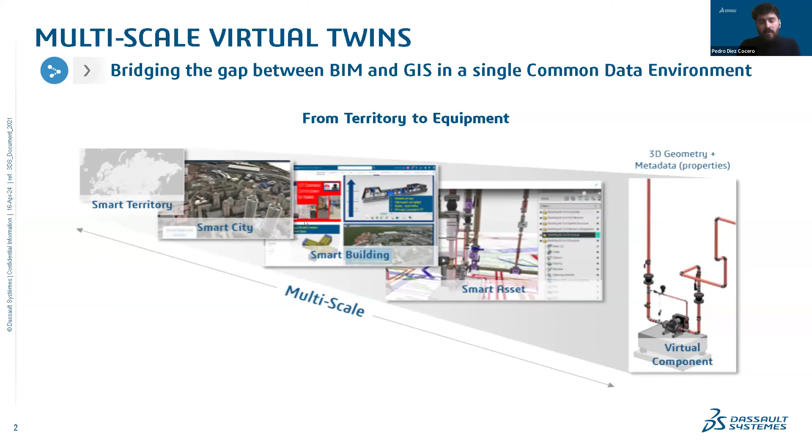And typically, when we look at IFC and specifically building design, we stay at the layer of building, asset, and component. But of course, it's very relevant to look at them from a bigger scale to address these kinds of interactions that I was describing, where these layers are more typically addressed from a GIS standpoint. And traditionally, there exists this gap between the two that we are able to address with 3D Experience. So let's have a look at how we're doing that.

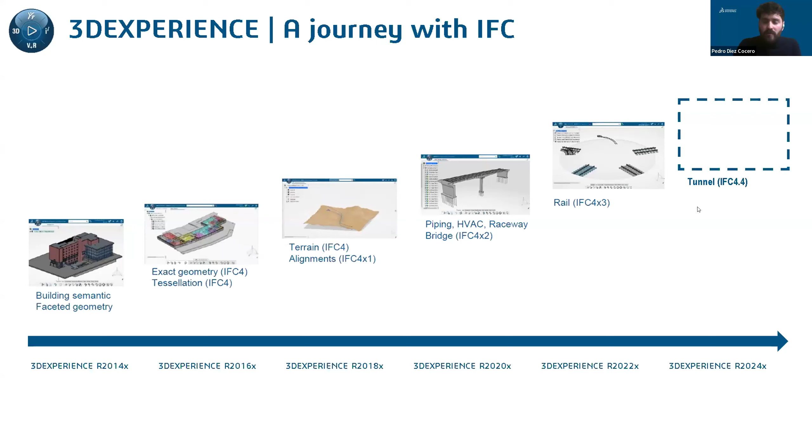Before we get there, I think it's relevant also to explain how IFC is a very important enabler of this right-hand side of the multi-scale virtual twin, how it has been progressively growing to address different scales of the asset as well, and how with our 3D Experience platform, we've been committed since the very beginning to adopt IFC as a main enabler, as a main standard for supporting this building information layer for all the previous versions of IFC, including IFC 4.3, which is now released, and with the current implementation of IFC 4.4, that I think Andrew will be mentioning something about as well.

If we look at how we address IFC with our 3D Experience platform, we crunch all the data that comes in an IFC file, we ingest it in our platform, and we convert it into our data model, where we have different entities that represent the behavior of all the different layers that are inside the IFC file, inside the building. And we're able to capture all the semantics and all the metadata that comes with the IFC file and assign it to these specific components.

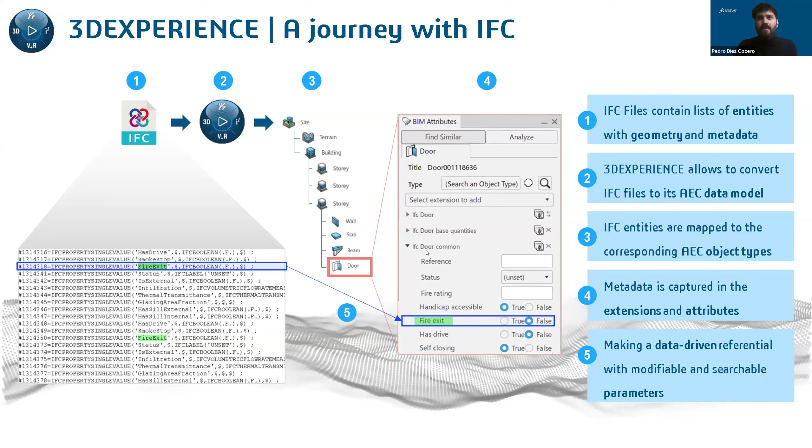So that in the end, we have a data-driven referential that has parameters that can be searched, filtered, modified, and that represent accurately this component scale of the virtual twin. In the end, what we provide is a full data model that addresses all the different semantics that are part of the IFC standard, and that allows us to have this accurate representation of the virtual twin of the building, and where again we are committed to continue supporting the different versions of the IFC standard in the future.

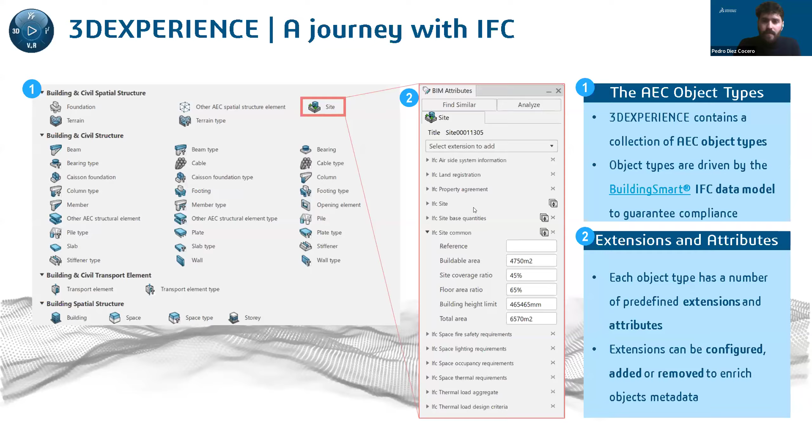In the end, what you get when you import these IFC files into 3D Experience is a connected virtual twin with, of course, the structure, the geometry, and all the attributes. But more importantly, that can be further enriched, that can be connected to other layers of information. It can be tasks, issues, documents that can be addressing the specific element of the asset that they are representing and that they are describing.

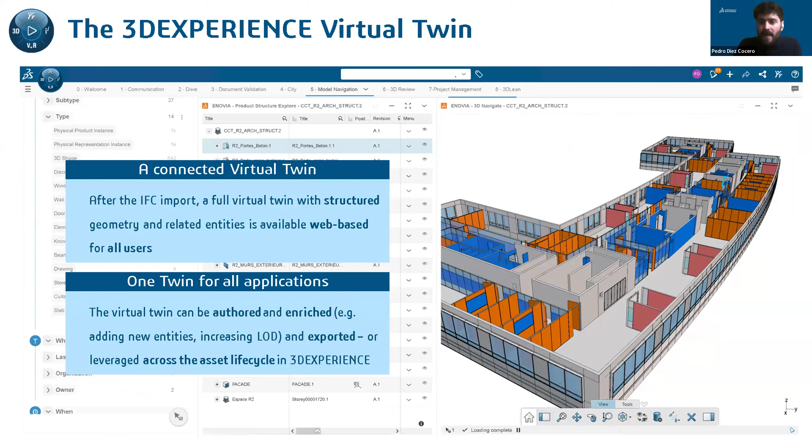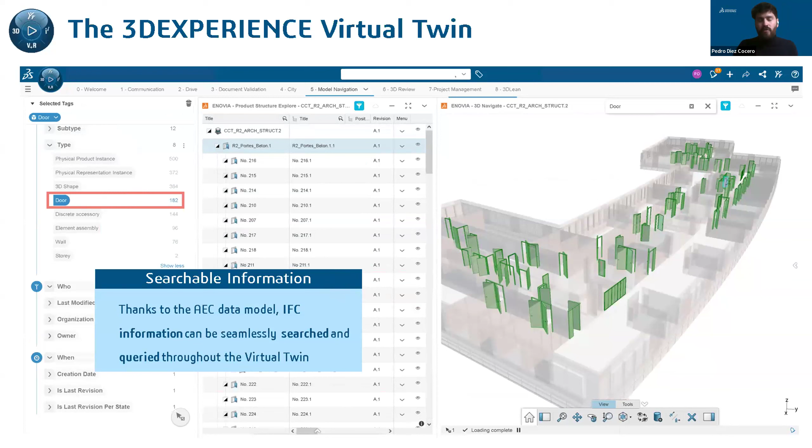And that can also be modified and further enriched, where we, of course, capture all the semantics or the metadata that is behind the asset in a faithful way that can be navigated and accessed by all users from the web browser. And this semantic allows us to interrogate the asset, to run queries, to filter, and to retrieve all the information that is relevant to make decisions across the different stages of the asset lifecycle.

Now we've covered this layer at the building level: the equipment, component, system, and the building itself. But then we need to address that this building exists in a greater built environment. So how we address the gap between the two. And what we have in the same 3D Experience platform, where we are able to bring in these IFC models, is a GIS engine that allows us to process GIS information and combine it with BIM in the same common data environment. So we provide this multi-scale referential from territory to equipment, and that allows us to bridge this gap that traditionally exists between systems that address BIM and GIS separately.

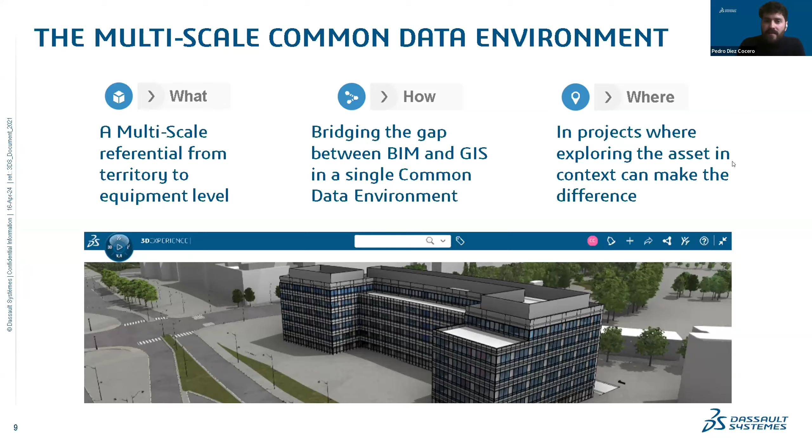And, well, in projects, exploring the asset in context can make a huge difference. And I have some examples, but of course, Andrew and Alessandro will be telling us more about that. So if we have a quick look at what's this multi-scale virtual twin and what we can do with it through 3D Experience, it is that we have this very accurate representation of the built environment that surrounds our asset.

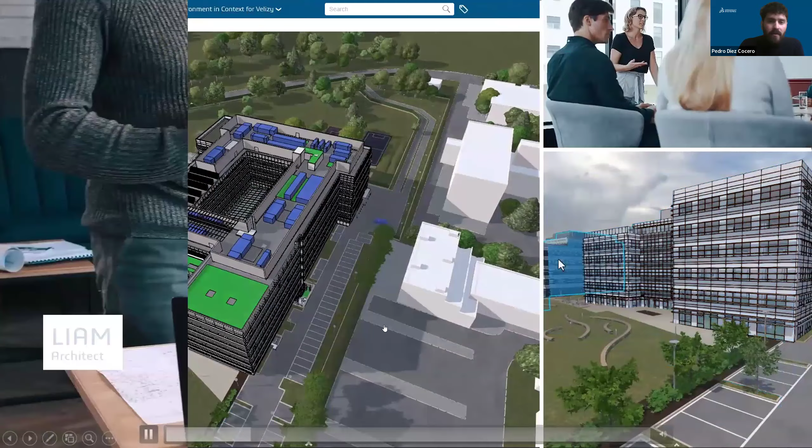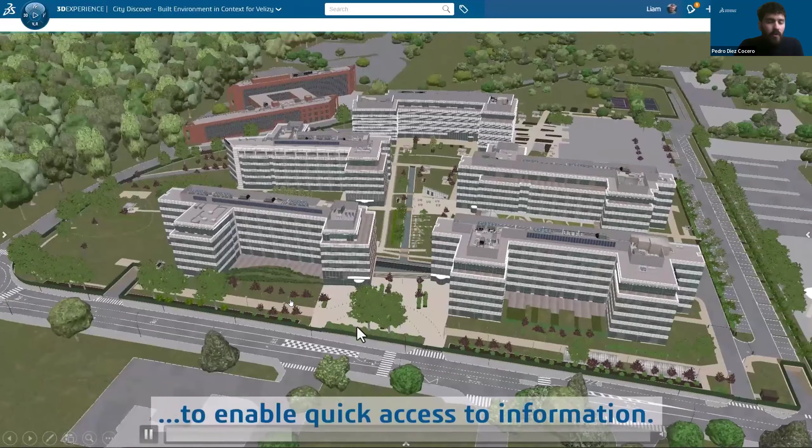It can be at district level, at city level, at territory level, where we can bring in directly the BIM model of our assets. Of course, we have different layers of geographical information in addition to the 3D. It can be anything from map views to orthophotos, CityGML. We also support multiple standards in that domain, with textured models as well, orthophotos, you name it.

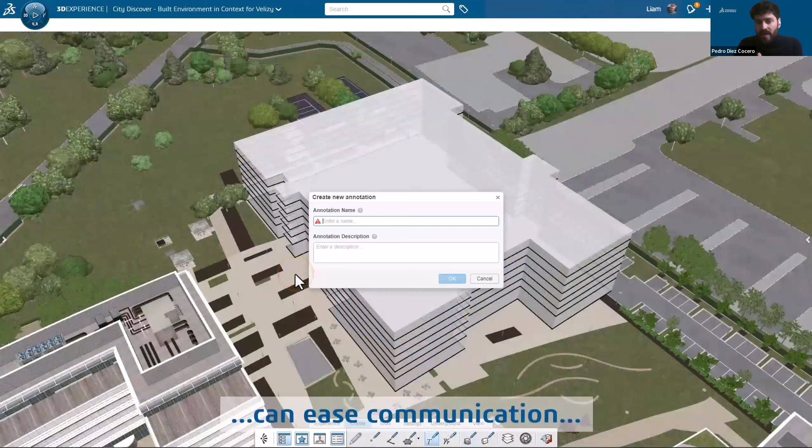And the idea is that we can leverage this GIS referential at any stage of the asset lifecycle, from early on to run this concept analysis where we can already plan a basic shape of the asset in the context where it will be existing. And we can already leverage this referential to make annotations, understand what it is that the asset needs to fulfill in relation to its context.

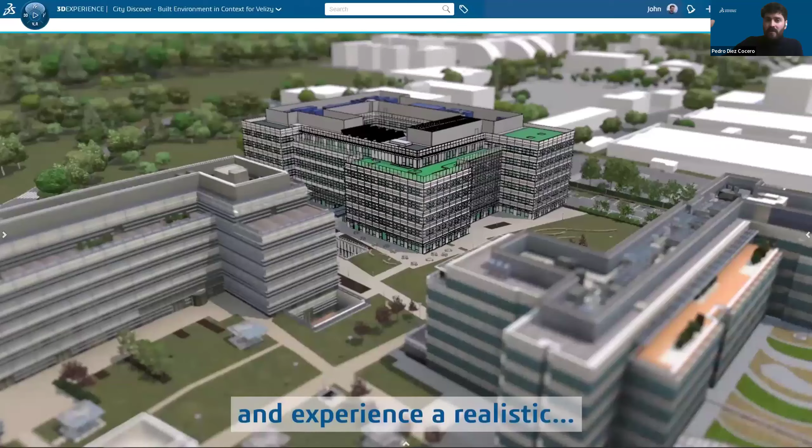Once we have a more detailed representation of the asset, maybe coming from the IFC models that have been provided by our suppliers, we can directly bring that BIM model that has been imported from IFC into the GIS representation and into the GIS referential.

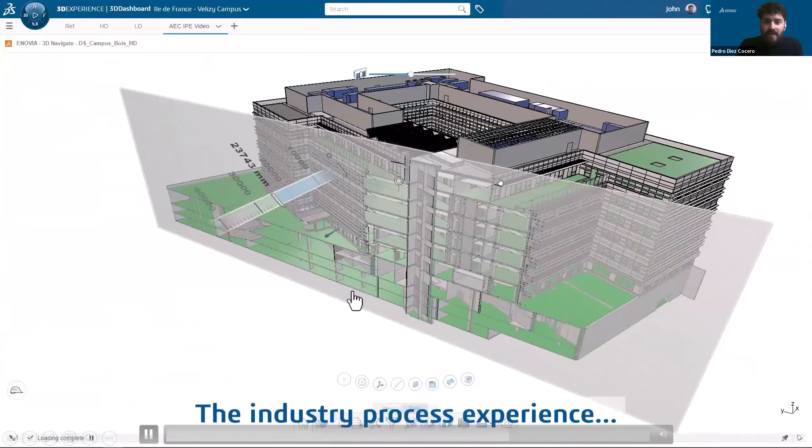And because it's part of the same common data environment, it can also be connected with tasks, with issues, with documents, and we can at any given time navigate the detailed representation of the asset, having a seamless connection between the GIS layer of the building and the BIM detailed model of the asset, having again this multi-scale virtual twin of our asset.

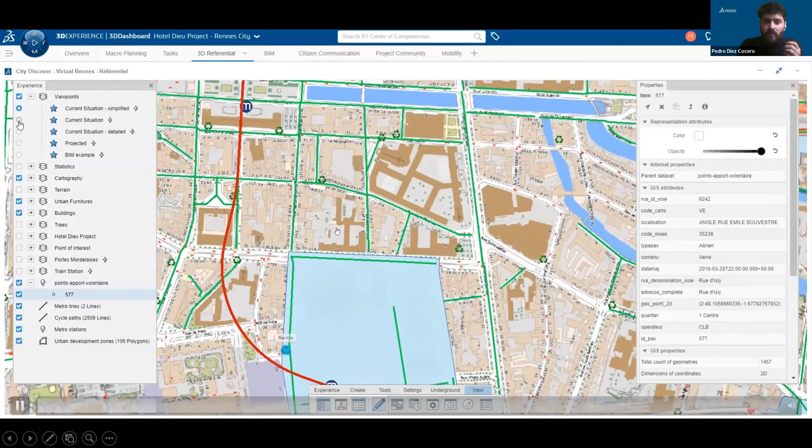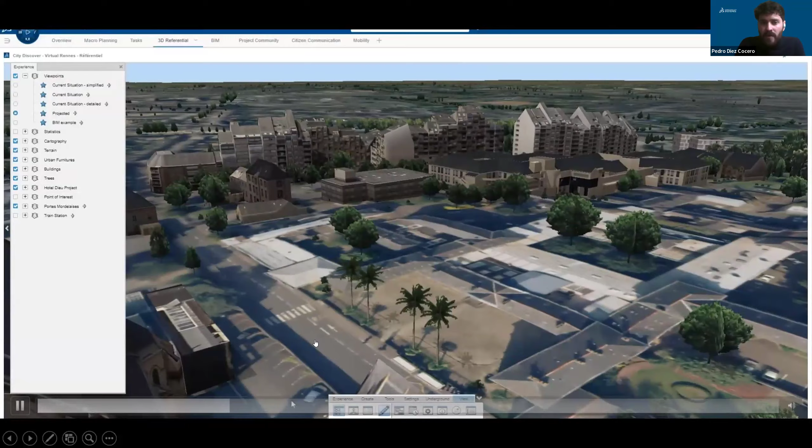Why is this so relevant? It's because we can have this bi-directional connection. So on one side, we can have the case where we have a GIS referential, maybe at city scale or territory scale, different layers that represent a specific district where we want to do the development of a new building or a new project. And we can make decisions based on the information that we keep at GIS layer. So for instance, information on the traffic and the surrounding areas, information on the certain public services that are available per district. And we can use this GIS referential to plan the development of our project.

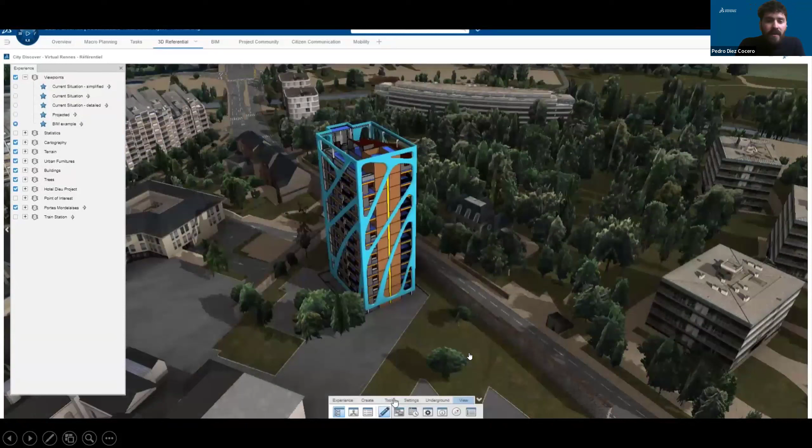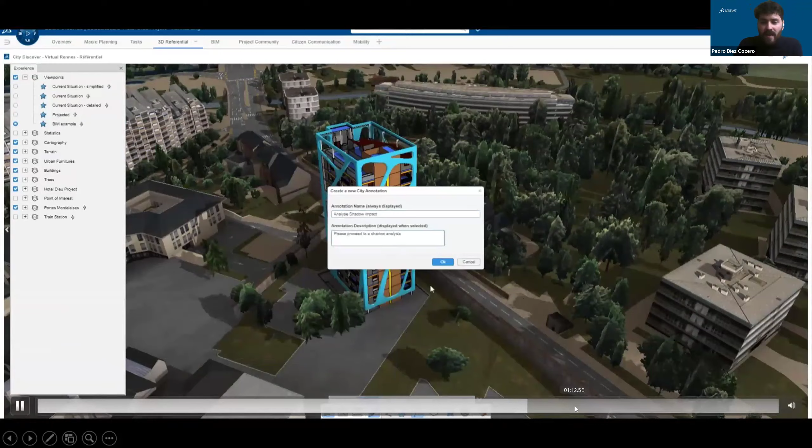And at this stage, we're already able to bring in BIM detailed models directly into the GIS context. That saves lots of time in converting, simplifying, addressing the model. We are able to directly bring in this BIM model, see how it looks in the GIS referential, make annotations, and use that to keep feedback to the responsibles of designing the asset itself. And of course, the biggest value is that in this same referential, we keep these two views of the asset.

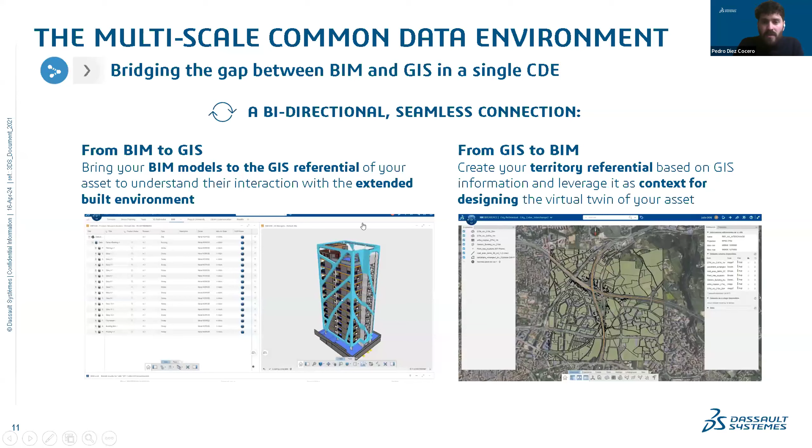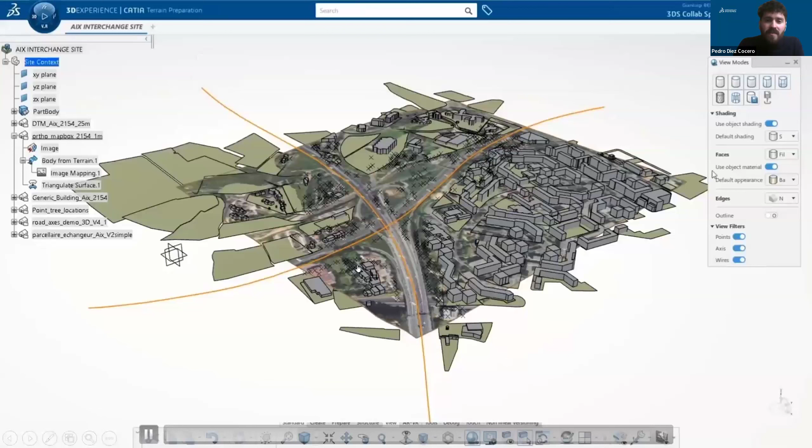So this is one way, bringing BIM into GIS, but the other thing that we can address is the opposite journey. So going from GIS to BIM, where what we're able to do is to extract specific area of the GIS referential where we want to do the design of a new asset. And then we're able to bring it into our own design context. This is in CATIA, embedded into the 3DEXPERIENCE. And we can extract all the information of the terrain of the area where we are going to do the design. And we can use it as context for designing our assets. In this case, it's the interchange of a highway.

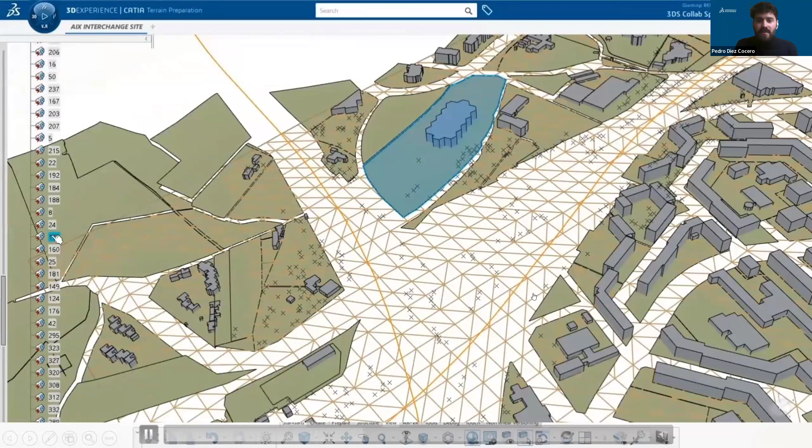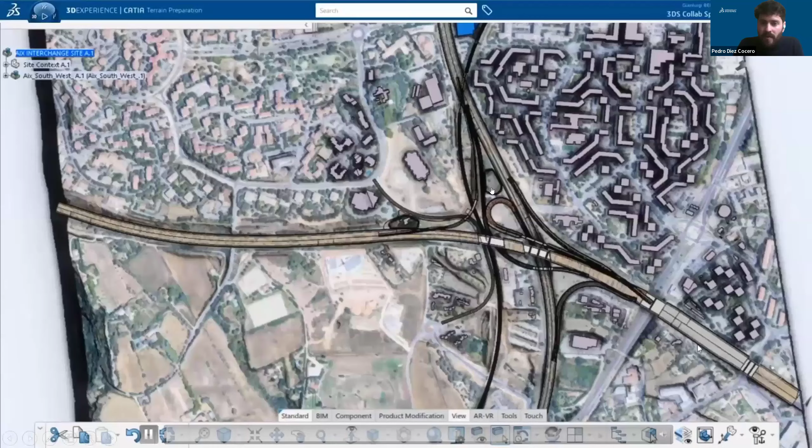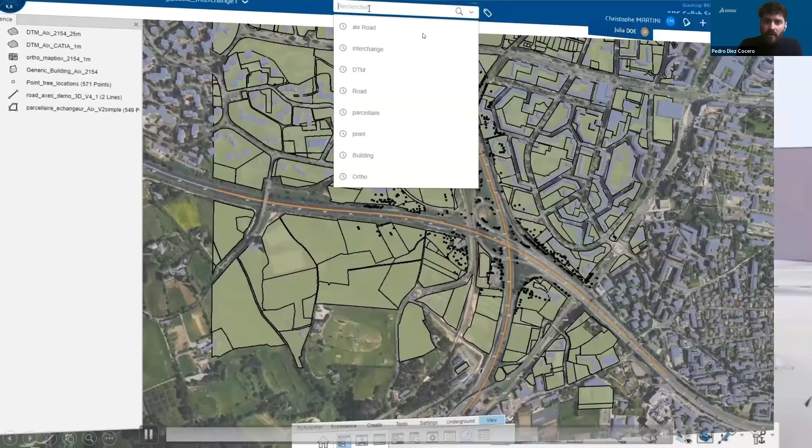And what we can leverage is all the information that is in the GIS that is captured into the design context. So we can use that to do the design of our interchange, making sure that it's respecting all the areas, all the parcels, or the properties, that is consistent and accurate in respecting natural areas, distances, regulations, all that. And once we have this representation of our asset, we can, of course, bring the detailed model, in this case of this interchange, and bring it back to our GIS referential, keeping an accurate representation with the latest version of the GIS referential for the asset itself.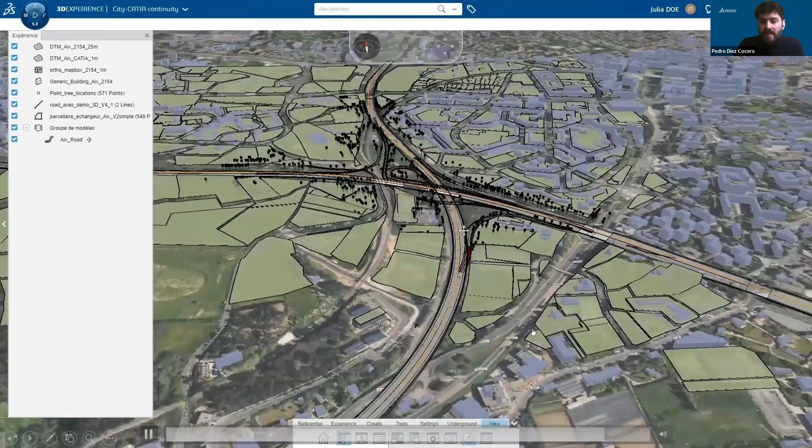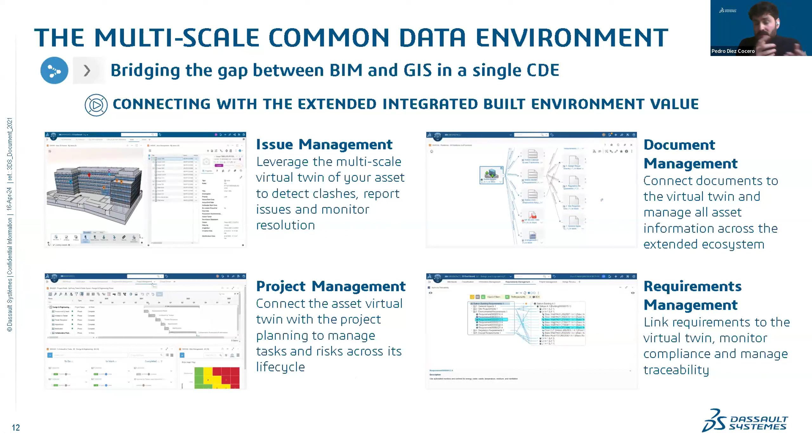Something important to stress here is that it's not just a beautiful representation of the virtual twin of our asset. It has all the layers of a common data environment behind. So we're talking about being able to do issue management, leveraging this multi-scale virtual twin. We're able to connect documents that are related to the asset at any given level. We can do project management in the same virtual environment, in the same common data environment. We're able to manage requirements with full traceability on all the information, being able to have access to this golden thread of information connecting all the different layers of the asset.

Where does this become relevant? Here I've highlighted a few examples. So anything from terrain work preparation, where typically you need to make sure that the asset that you're designing needs to be consistent with the terrain information, and we're able to do modeling in the same GIS referential of underground information with the geological properties and any kind of information that you would expect to do the terrain analysis. We're able to combine these two models to provide input for the contractor responsible for the excavation works, for instance.

Another interesting use case that we are seeing more and more is for utilities network alignment. Typically, utilities companies, and especially the transmission system operators, like the ones that we are starting to see in this new engagement of buildingSMART, they need to combine GIS information for the power lines that are distributed across large pieces of territory with the BIM detailed models of the substations that they need to model. And they need to combine these two layers. So by having both layers in the same referential, we're able to seamlessly connect the GIS information of the power lines that arrive to the substations with the detailed model of the substations themselves.

Of course, once you have this GIS referential, it can be leveraged for monitoring projects. So if you're a subcontractor or general contractor that needs to keep track of many developments, many projects over territory, it could be over a country, for instance, you can leverage the GIS referential to master all the subcontractors that are responsible for the different parts of a project. You can check the status of the different projects. You can leverage all the metadata behind to track this information.

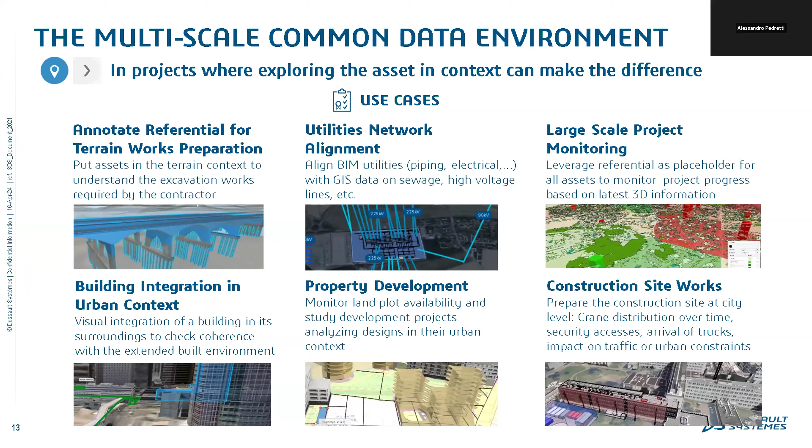Yes, Pedro. Thank you very much. Thank you for your great introduction. Do you see my screen? Yes. Okay, great. Hello, everyone.

Just a few words about myself. I'm Alessandro Pedretti. I'm a business development and BIM manager here in IDeCOM. I try to support our customers implementing the 3DEXPERIENCE platform as an enterprise solution for their projects.

This is the agenda I will follow during my session. I will make a brief introduction on who we are at IDeCOM and what we do. Then I will quickly move to the project scenario. I want to talk about an old water system infrastructure built at the beginning of the 19th century, more or less, with the aim of giving you an overview of the methodology and the processes we adopted during this project in the 3DEXPERIENCE platform. I will be more technical with respect to the background that Pedro gave us a few moments ago. Our company profile. We started working as a civil engineering design company in

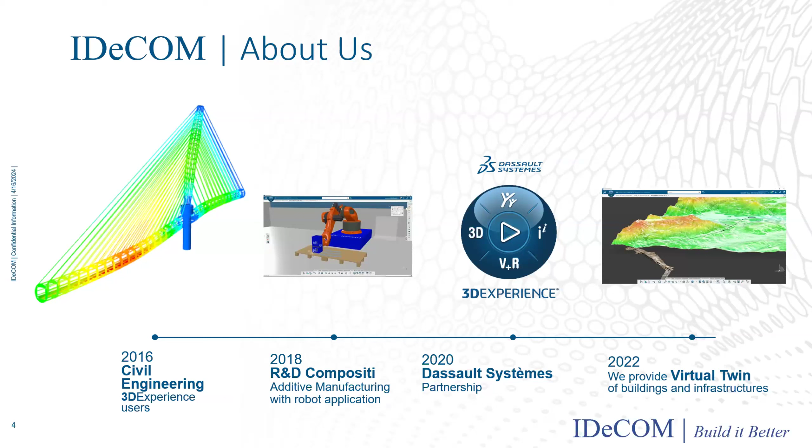Our specialized application of the 3DEXPERIENCE platform attracted the interest of Dassault Systèmes for the AEC industry. So in 2020, we started a strategic partnership thanks to our expertise. Now our objective is to be the best consultant for our customers to introduce digital processes in their BIM projects. Okay, let's jump to the project I want to talk about.

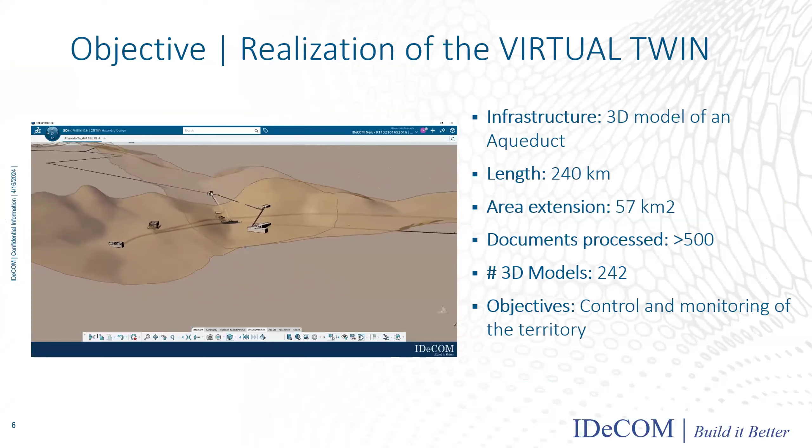During the last 6 months of the past year, we started building up a huge linear infrastructure of an aqueduct in Italy. 240 kilometers, more or less, of linear infrastructure. It started being built, as I said before, in the beginning of the 19th century and ended in 1950, more or less. The infrastructure crosses almost 57 square kilometers of terrain, and it's largely made up of historical bridges and underground structures, tunnels, galleries that are still working.

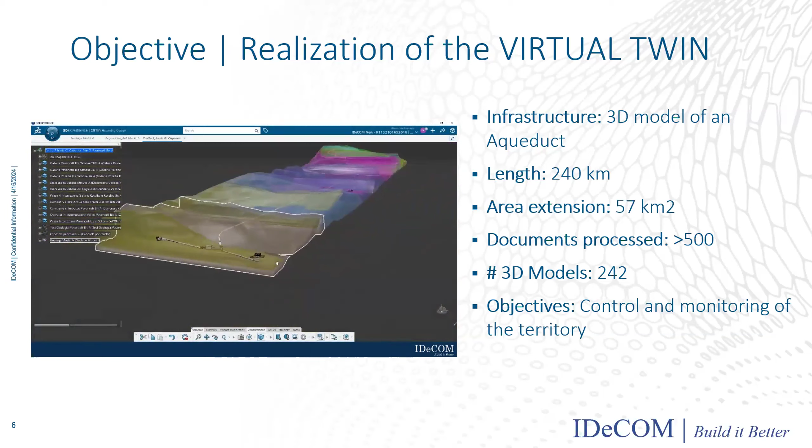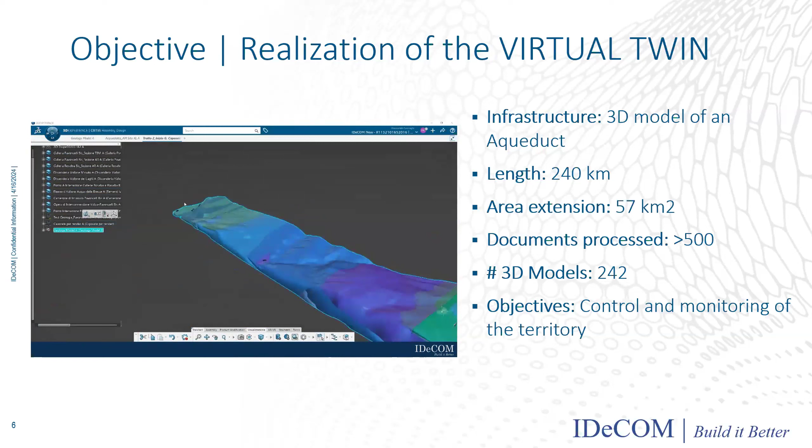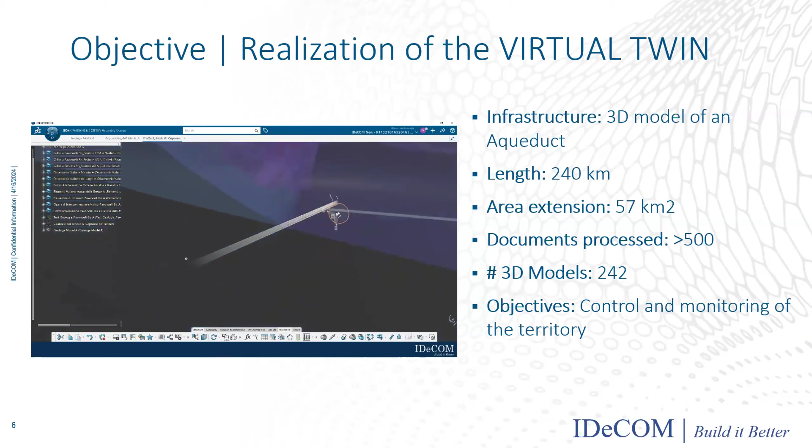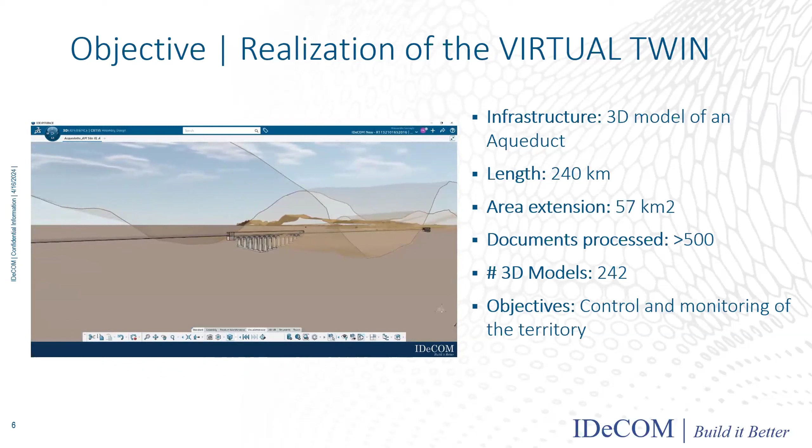And our challenge was to digitalize a lot of information, as you saw in the video. We analyzed a huge amount of historical data, starting from manual drawings to more recent 2D DWG and reports that helped us create the BIM model. In order to handle huge models like this, you need to take into consideration the scale of infrastructure like this, comparable to the scale of a region, a large territory. So you have to talk about GIS.

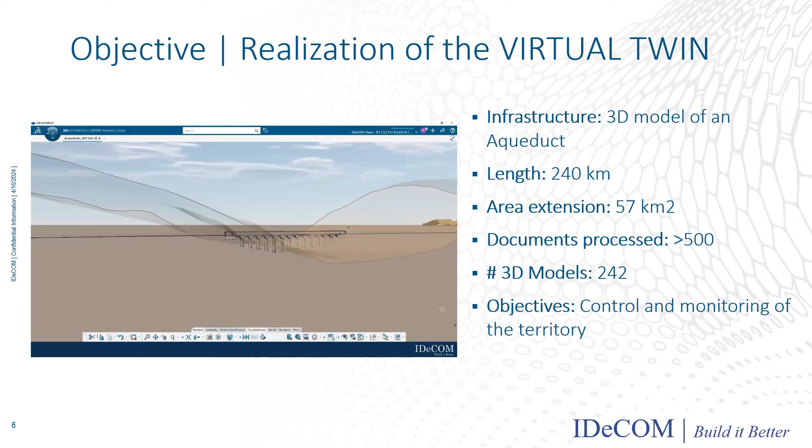The ability to handle such a large assembly, composed of more than 240 models, more or less, in a unique environment, a common data environment. So we use only one software, one solution to manage BIM data and GIS, geographic information. And last but not least, you have seen the ability to perform simulation on the same data, and we made FEM analysis of the landslide, as we can see in the slide later.

Okay. We built a real digital twin of the existing infrastructure, a full-scale BIM model with a level of detail high enough to represent also the damages along the tunnels. As I said before, the extension of the project is so huge that we have to think at territorial scale. So we started building up the terrain and the infrastructure using open GIS databases to retrieve all the territorial information as a source of 2D data, elaborated with visual scripting, a special modeling technique in the 3DEXPERIENCE platform, to create a parametric 3D model geolocated in the right position in a GIS context. This allows the end user to manage resources on a territorial scale, ensure control over the asset, and make correct decisions based on the location of the asset and the conditions.

The entire infrastructure crosses different types of unstable terrain, and thanks to geological information deriving from geological campaigns over the years, it has also been possible to create the 3D geological model of the conditions the aqueduct crosses, which helps us understand the exact position of the main faults that affect the infrastructure and are the main cause of damages to it, causing also potential infiltration of dangerous chemical substances in the water. So thanks to the BIM model of the infrastructure and the geology model in the same environment, we are able to simulate potential landslide phenomena that can impact the infrastructure.

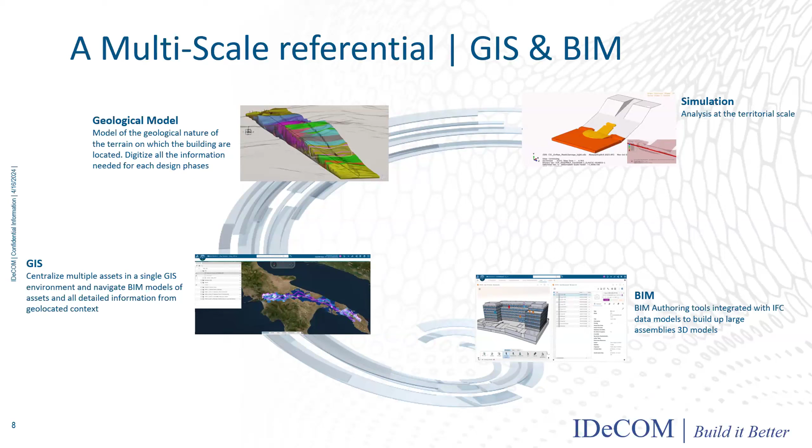As Pedro said before, in the 3DEXPERIENCE platform the whole AEC data model is implemented, with the ability to import and export the IFC file format. And 3DEXPERIENCE is also open to commercial data formats coming from Autodesk, for example. For this project, we used 3D models coming from Revit and 2D drawings made in AutoCAD. But obviously, 3DEXPERIENCE is a platform open also to other CAD standards such as DXF, STEP, and so on.

There are basically two ways to approach data management in 3DEXPERIENCE: a file-based approach and a PLM approach. In the first case, you import a 3D model, and in case of revision to the model, you need to import a new version again. In the second, the PLM approach, you connect to 3DEXPERIENCE with your BIM authoring tool, and you save the model from the original BIM software using a sort of plugin. No need to import or export files. And in this way, you can manage the entire life cycle of the model.

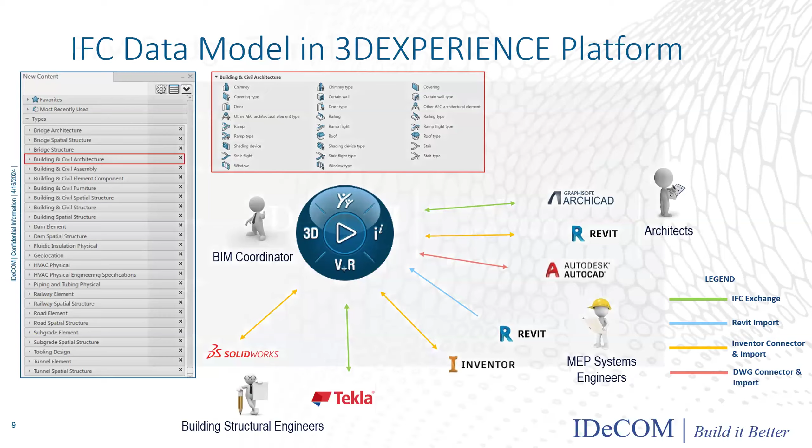This is a more practical video focusing mainly on the technique adopted to model some part of the infrastructure, since we need to quickly model in 3D many kilometers of existing bridges, respecting all the reports, the inspection reports coming from the maintenance activities on the field performed by the owner. So we need an efficient modeling strategy that would allow us to model quickly and meet the required timelines and milestones.

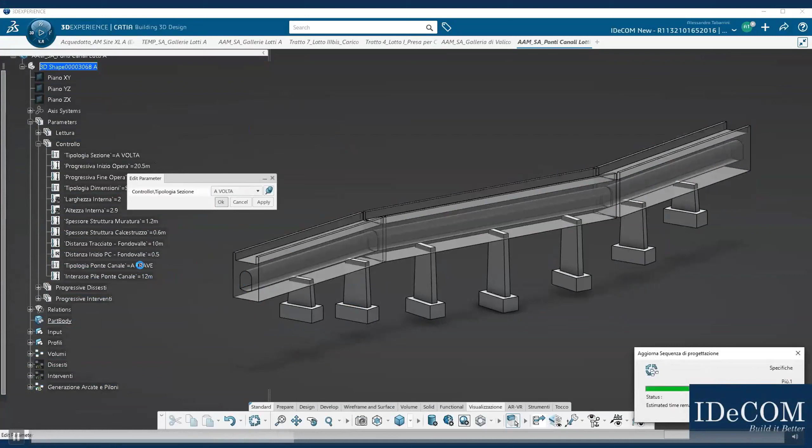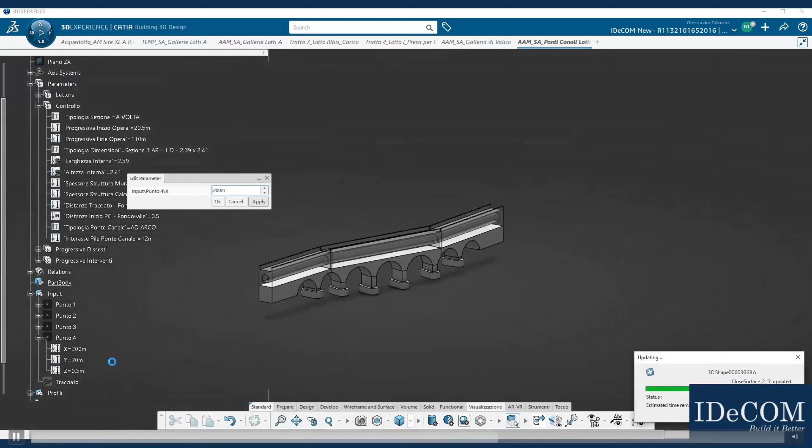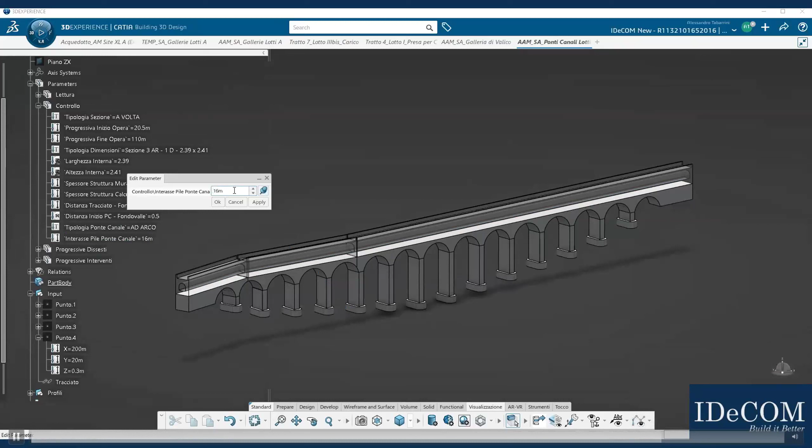What you are seeing now is a parametric template of a bridge that can reproduce a lot of different geometrical and typological configurations that cover all types of bridges along the 240 kilometers of the track. So we collect all this configuration in one unique template, connecting its IFC attributes and information. Physically, the user selects a geolocation from GIS data and other sources, and then the template will automatically adapt, creating a new bridge model according to the rules you set.

This will grow in the details thanks to the change of LOD functionality present in 3D Experience. That means that using this poor geometry as input, a new 3D model can be instantiated with more geometrical details. For example, the models of rebars, steel detailing, and so on, coming from a catalog of detailed parametric templates that are already built in 3D Experience. Of course, they can be exported according to IFC schema.

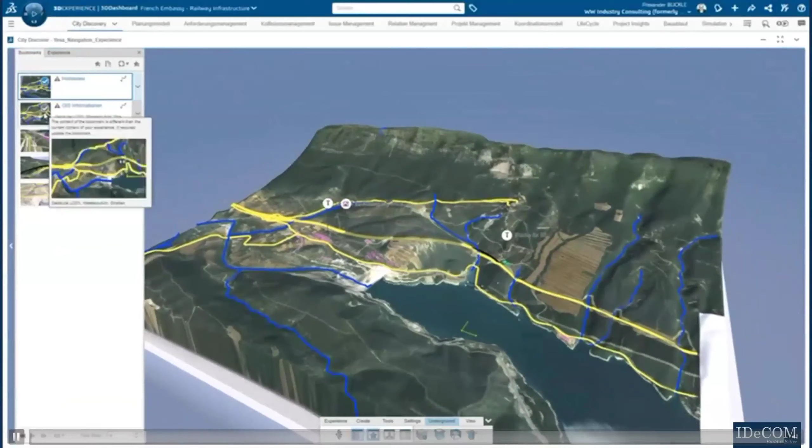This is another video I'd like to illustrate to show you the benefits of implementing GIS within the 3D Experience platform. In particular, we focus on the power of the integration between GIS, BIM, and CAD, and how this integration can be a revolution for asset management.

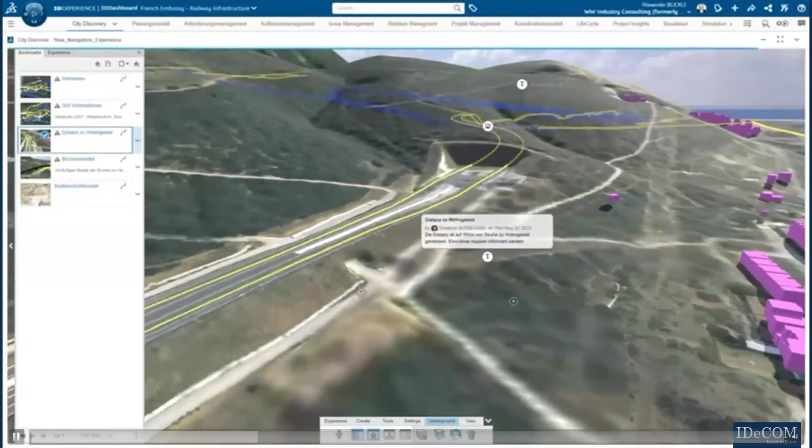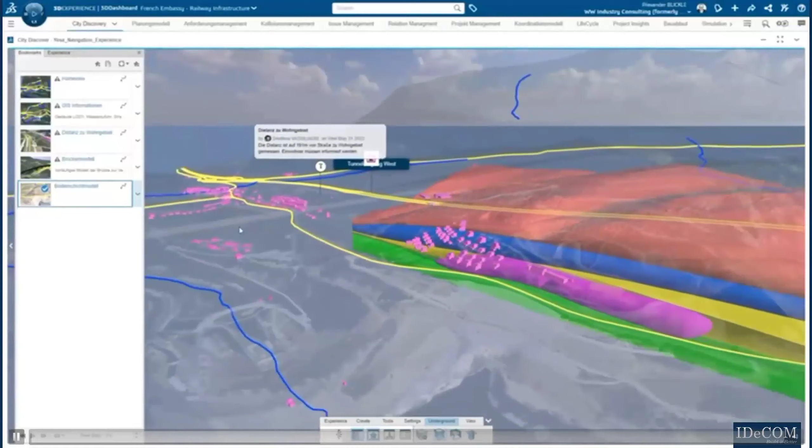The first point to consider is the ability to integrate existing GIS information with BIM and CAD models of the asset in one unique environment without the need to import or export files. An accurate view of our infrastructure in context, having both the 3D model of the building, the geological model, and GIS information in one place. That can help a lot with planning and management activities from the municipality, for example.

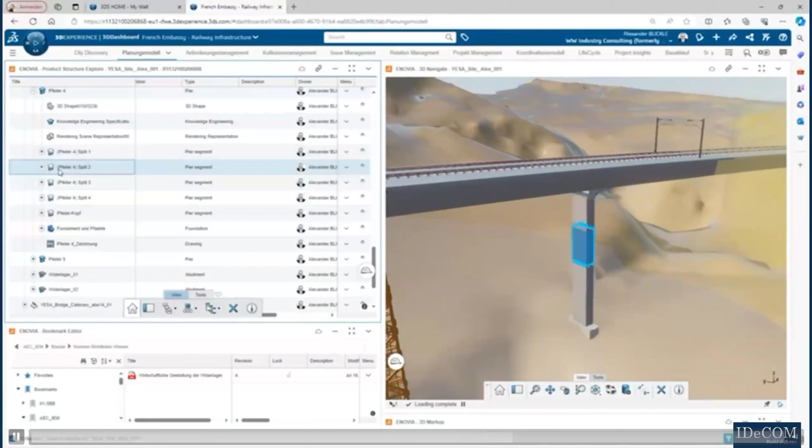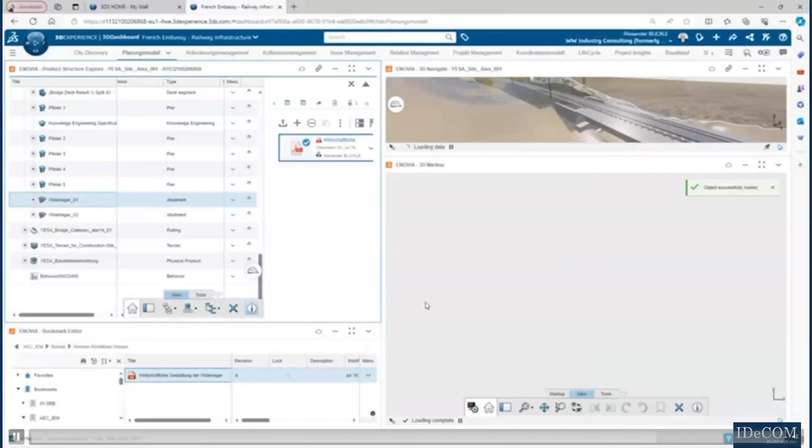In 3D Experience, you can leverage GIS querying functionalities based on geographical information, so we can do geospatial analysis and quickly retrieve all necessary data to make the right decision, optimizing the necessary operations. Another key point is the increase in information traceability. With GIS and BIM integrated into 3D Experience, we can easily trace the origin and the history of each asset, improving our ability to monitor and manage the entire life cycle of the infrastructure.

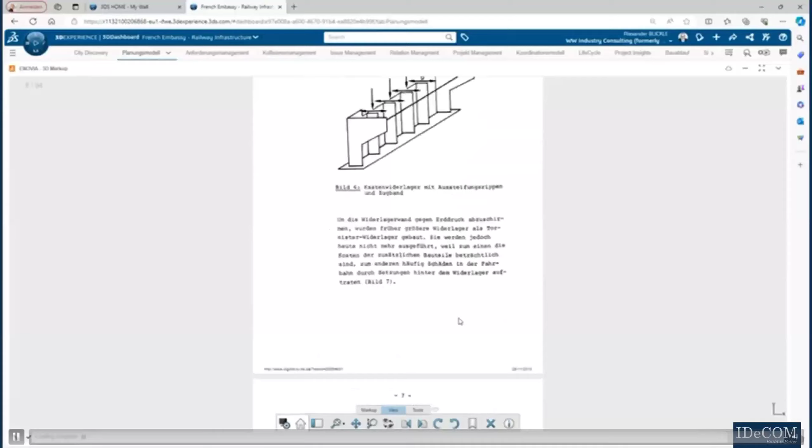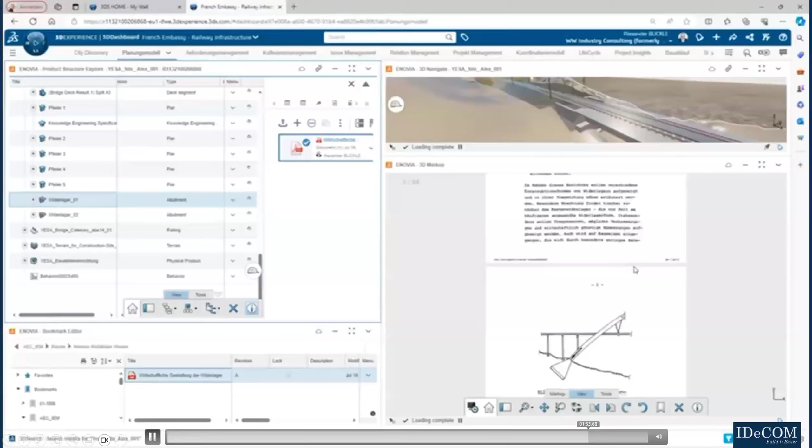Using the 3D Experience platform for our project, we can leverage structured data. It means that, as you have seen, the model has hierarchical data. In the model, you can also attach your data, for example PDF for technical specifications, or drawings, and you can easily query and find it via a web application, in the same work session, without the need to import or export.

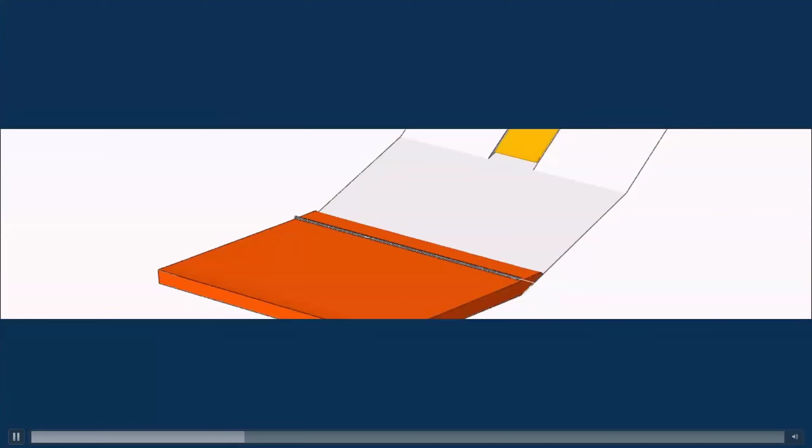In this case, we simulated a hypothetical landslide scenario, trying to assess the impact of such an event on a section of the pipeline. This is just a small example focused on the mechanical behavior of the structure.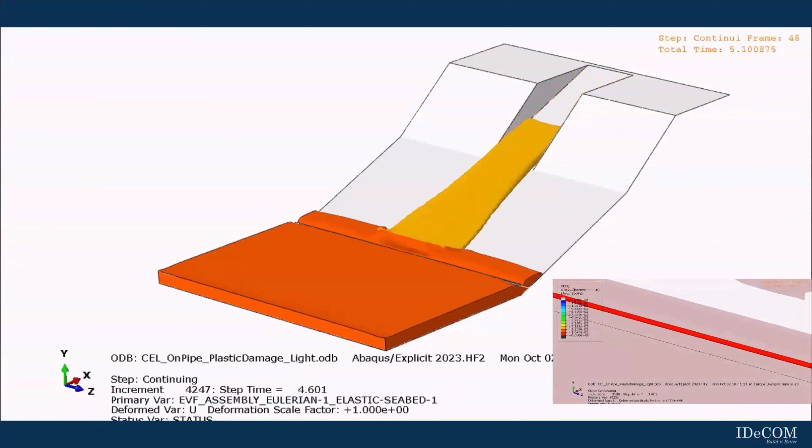But the 3D Experience platform is also used by other public administrations, such as, I remember, Hong Kong and Singapore municipality, to support their decisions, adding air and noise pollution and all scenarios that can be simulated within the platform to test the benefits of mitigation actions and predict possible critical impacts on people.

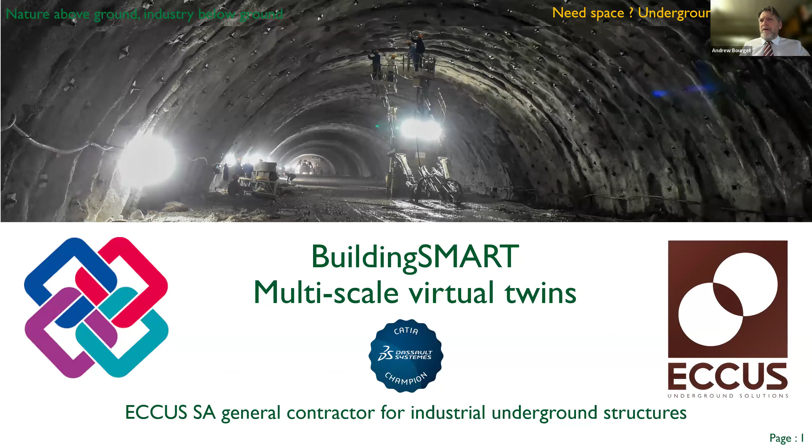Just a brief word that ECCUS, we're a contractor. We have our own design office, and we are involved in underground structures. I want to go through what brought us to CATIA, with a specific focus on multi-scale virtual twins, which is really key in our activity.

I'll go through some technical issues all civil engineers are aware of. The second you start going for a single source of truth approach, where everything is concentrated rather than multiple different files, you're confronted with different scales. Here's an image of the Geneva Basin where you can second-guess the geology underneath the orthophoto, with the different geological faults present.

So you need to get a grip of your general environment, as was said earlier. But then you've got to actually model your structure, what you're being paid for, and place it into context with neighboring buildings, not just in our case, the geology. Civil engineering is not the end-all be-all - it's just the container for a lot of mechanical and electrical equipment.

These three contexts work with different tolerances. So the second you want to start doing takeoffs, setting out drawings, you really have your work cut out trying to manage those different levels of tolerance.

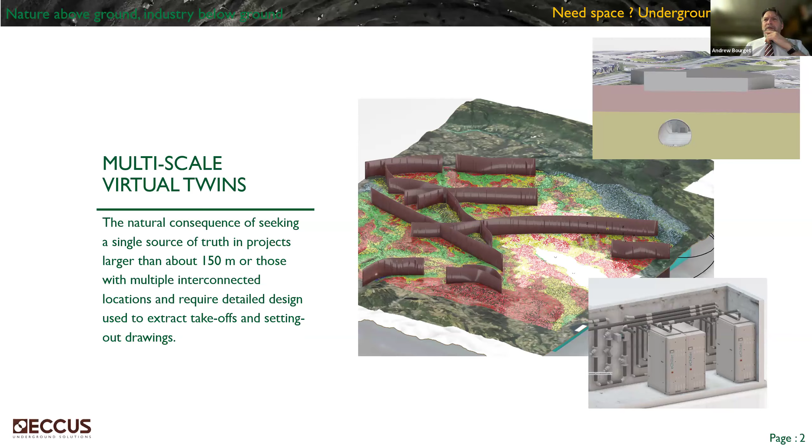We all operate in a legal context. The cadastre is always with respect to a local projection system, and you need to place your project in that legal context. We're not just drawing it out of context - we need to tie it in with what the building permit will require, not just on the surface level, but also in elevation. That is very important.

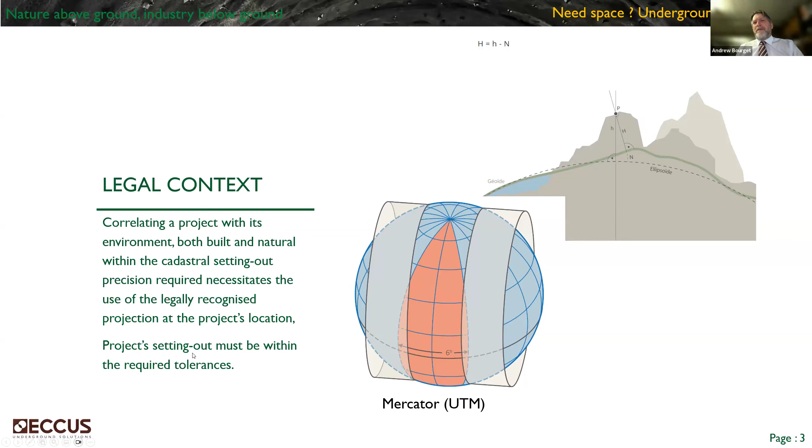So you're confronted from the start of a project with the problem of setting out your project. Once you've determined you're operating in a certain part of France or Switzerland or wherever, and you've got your own legal reference system, then you've got to manage your precision level.

We operate with large range and normal range, which for civil engineering we found amply sufficient. Large range is our geological models, our terrain models, going from 1 millimeter up to 100 kilometers - that's our in-situation models. When we go down to our structures, well, it depends.

If we're talking about a tunnel that's 15 kilometers long, we stay in large range. If we're going into certain specific structures like shafts, then we go back to normal range. And of course all the equipment, electromechanical and electrical installations, are done in normal range, which is micron precision - way beyond what we'd expect as a civil engineer.

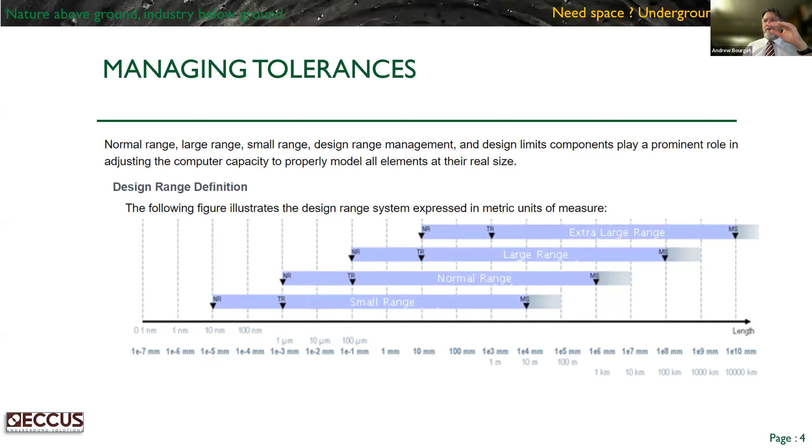Let me give an example of a project we had here in Switzerland, the TransRUN. You've got La Chaux-de-Fonds up here, which is at 900 meters - the highest city in elevation in Europe. And you've got Neuchâtel down here, so the difference in level is 900 meters.

You're confronted with local structures - you don't just have a single tunnel and that's it. You've got stations, various ancillary works, so you need to zoom in and break down your project into components. You must be able to superpose plot delimitations, various GIS information, and your structure.

It's maybe a bit small, but here you've got the tunnel meters, or project meters to be more precise. If you change your alignment, these will change and it will have an effect on all your local structures. You can't study one shaft totally independent of your alignment - you're going to get all sorts of issues, starting with where it is along the alignment, because if the alignment numbers change, you need to get that up to date.

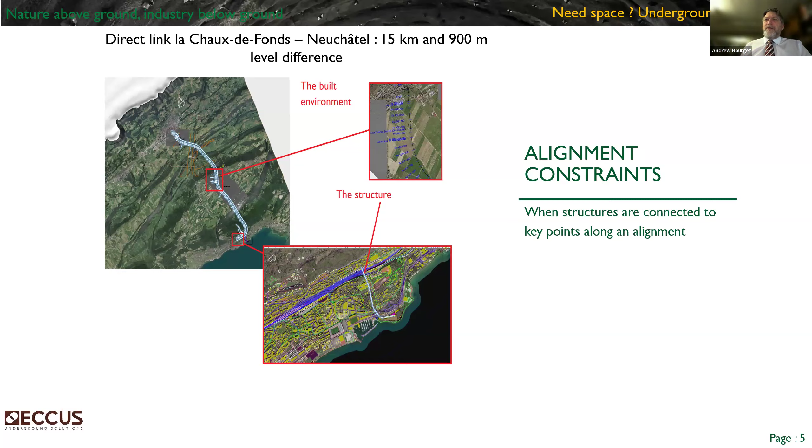Of course, Pedro showed a bit of the geology. The geologists work in a totally different scale from us, so we need to integrate that. Here we've got the geological model that's 15 kilometers by 15 kilometers, which has helped us do the alignment, making sure we're not intersecting any critical geological incidents that would render the project too costly or too technically challenging.

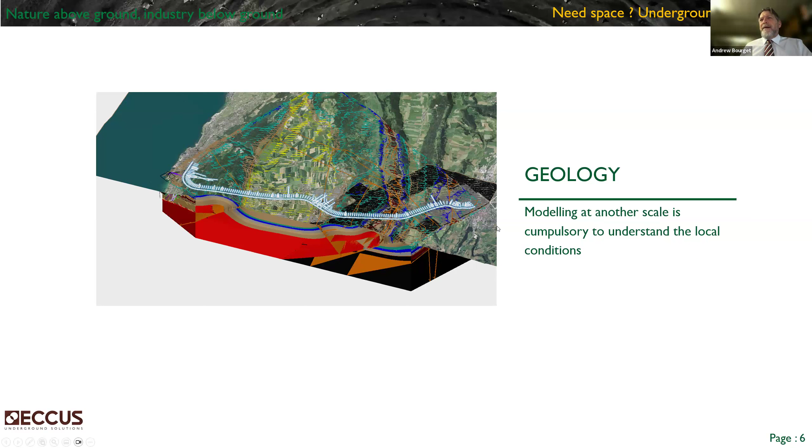This is very important, and there we work in large range. And then you've got this interaction that you need to get hold of. We've just seen the very large, the large range - the normal range is your structure, but it has to tie in with the local environment, it has to tie in with the buildings.

How we go about it is we immediately, at the start of a project, define a reference, a georeference point. We place it on the terrain model that we obtained. We define its projection references, which are predefined, and then we just determine where it is - what's the altitude, what's the northing and easting coordinates. We will then tie in all the project based on that reference.

It's got a system, CATIA, of publication, which facilitates the cross-referencing between different components of the project. So you axe your work based on how you're going to set it out.

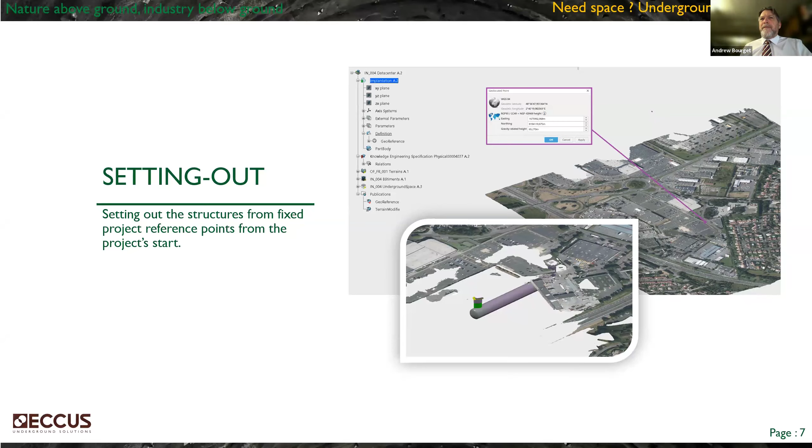Then you've got the issues, sort of mid-size issues. We go in large range here, which is calculate the basin, what's the flooding risks, how to dimension the drainage. So the drainage is quite small, pipes of 200 or 300 millimeters, and on the other hand you're talking about a surface area that's kilometers squared. So you really need to have these two levels within the same model.

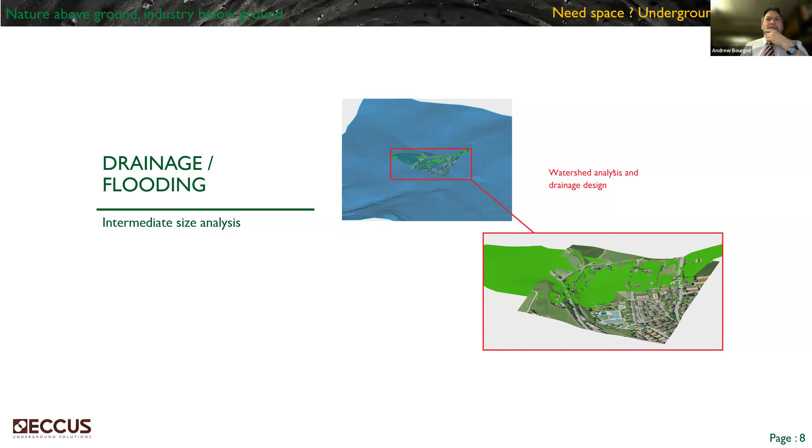And then you will overlap that with GIS information that's publicly available.

Lastly, I just want to go through the fact that you need to understand that at one point we're working with third parties, subcontractors or suppliers, and they will be working in their own reference system. So we must have that in mind when we go to work - it's one of the specifications we define with our suppliers. For example, here I've got the lift system with all the details, each structural member is defined. We've got our stair manufacturer that supplies us with that information, and we've got electrical components that we need to integrate into our structure.

So we need to change the level of LOD. CATIA calls it change LOD - you start up with a level 200, you go to 300, you go to 400. When you're going over to 400, you'll start integrating your suppliers' models. And that's very important, to have this various level of tolerances in your unique model.

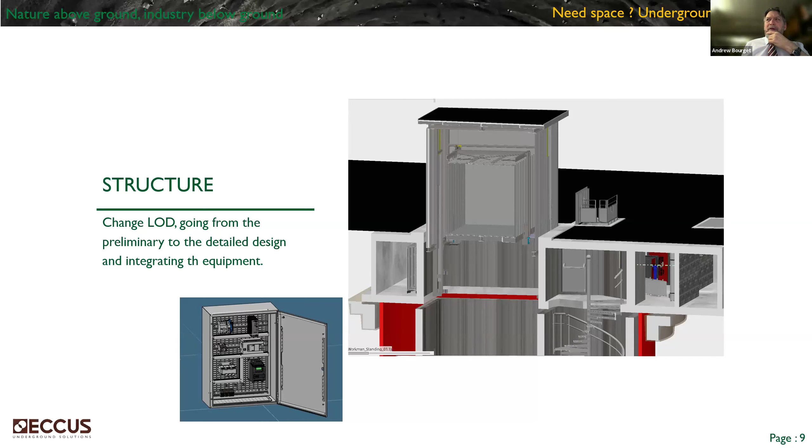There, thank you, I'm open to questions. It was a fast run through of the various issues that you need to manage if you want to have a single source of truth.